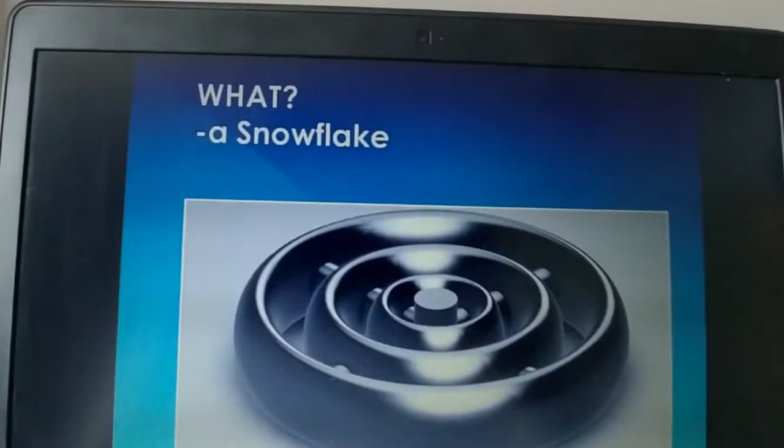Each settlement is called a snowflake. The 5 snowflakes can stick to each other in case physical components must be interchanged amongst them, a case which is represented in the following picture. All these drawings have been made using a 3D modeling software.

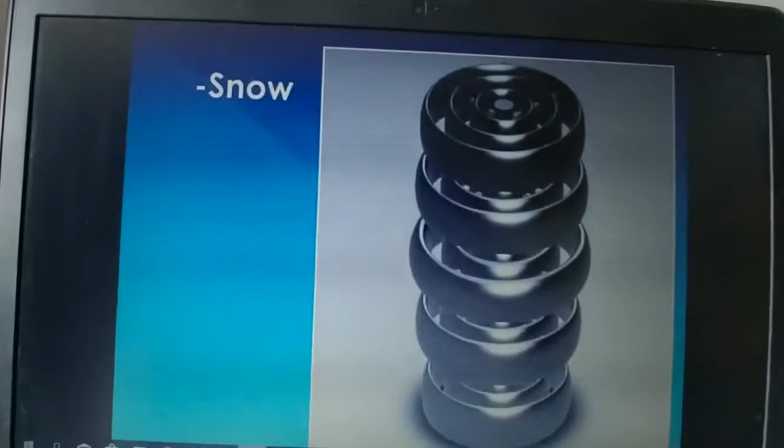Now, each snowflake consists of 3 concentric and interconnected tori. The only difference among these snowflakes is that their dimensions vary. The most important one, which is also the largest, is sent to orbit around Mars. The maximum capacity of each snowflake is 10,000 people, therefore there can be as many as 50,000 people in total on Snow.

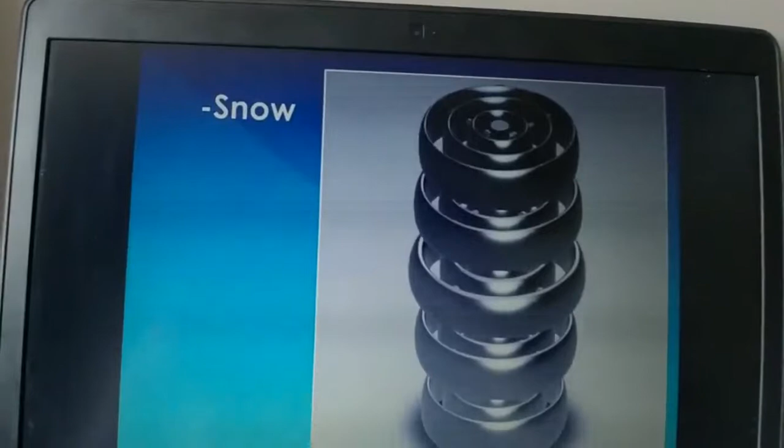The largest torus, Torus 1, is the one containing humans. Torus 2 is the one where agriculture is being practiced and where the data is safely backed up. Torus 3 is where all the fabrication of materials and the industries take place.

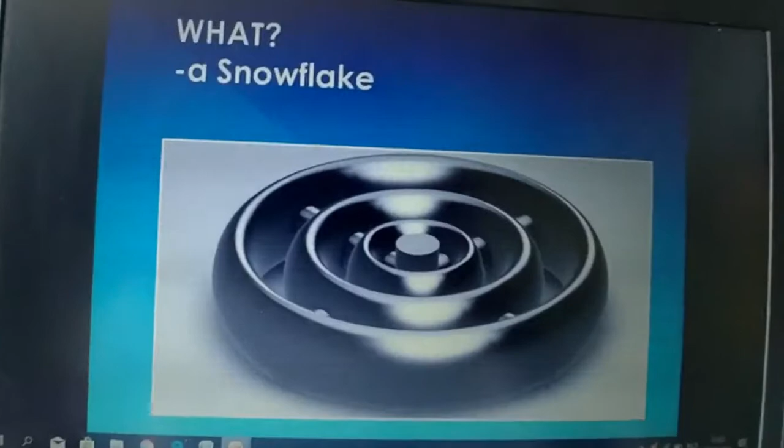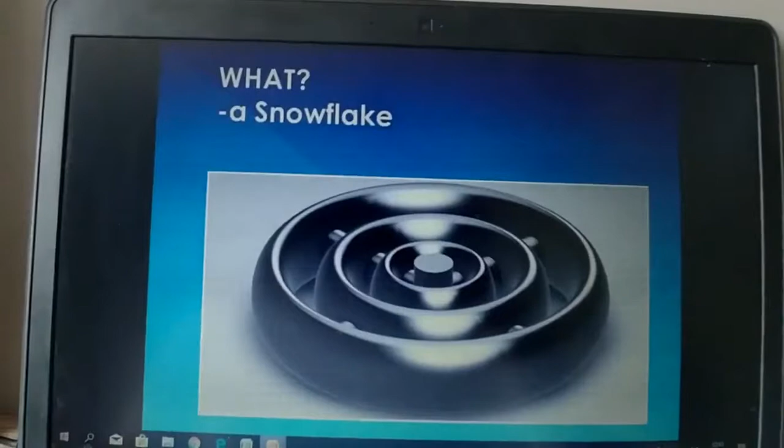But by now you must be wondering, why did I name it Snow? Well, Snow is the title used by the Nobel Prize winner and best-selling author Orhan Pamuk for one of his books, where he tells the story of a struggling poet. Snow is what connects people's souls in his book. It is what the poet refers to in his sea of thoughts. Snow is what everybody has in common.

Also, snow is a pure and beautiful natural phenomenon that does not only exist on Earth. It forms on some of the planets around which the space settlements orbit, even if it comes in the form of diamond or methane shower.

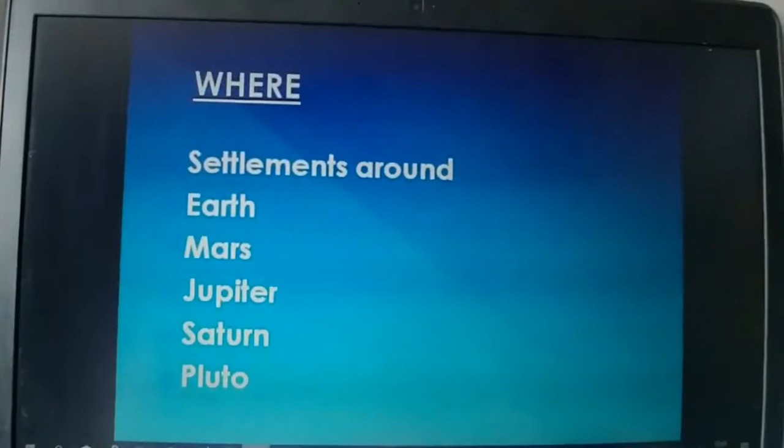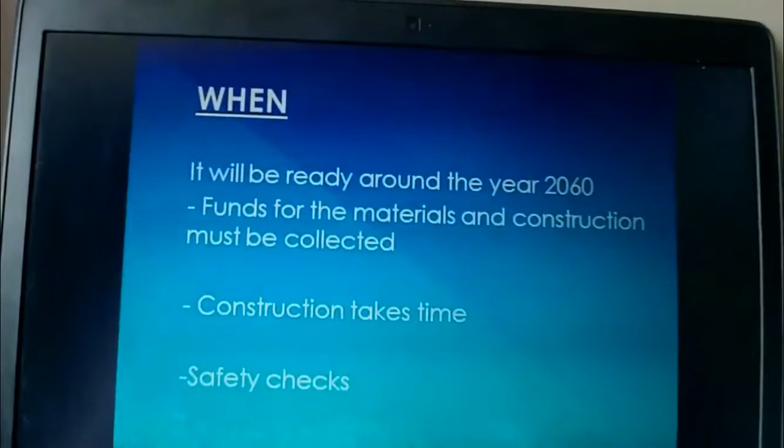Funds for the materials and constructions must be collected, which takes time. The actual building of such a huge construction lasts. Also, every single item on Snow must be checked, since it needs to provide everybody with safety, and it is very tricky to obtain this goal, since nothing similar has been done before.

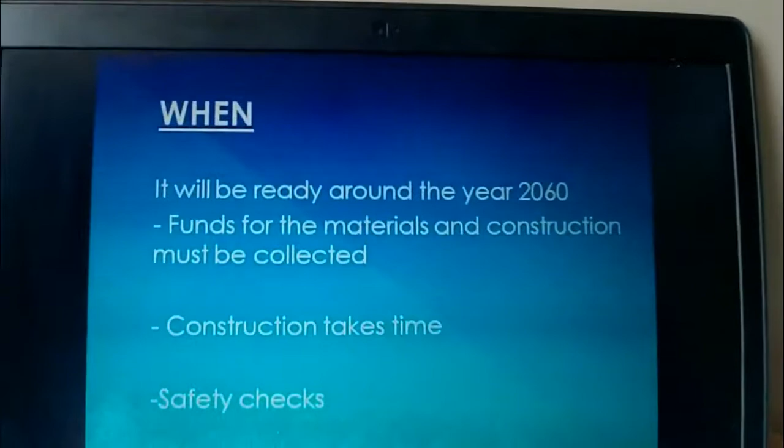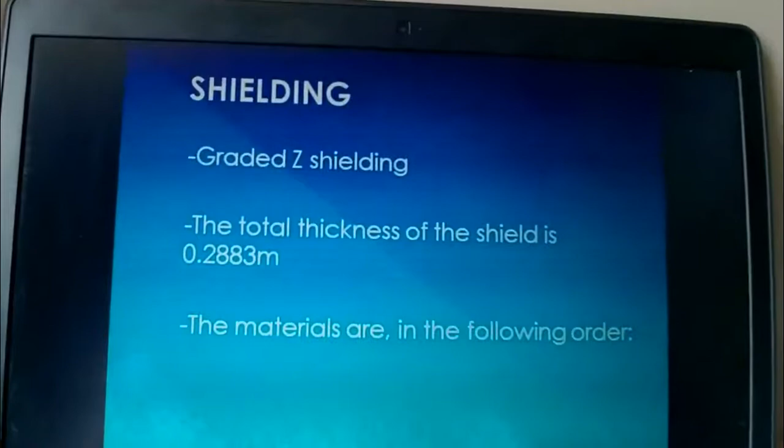The next major aspect Snow takes into consideration is its shield. It is known that there are 2 main forms of cosmic radiation: galactic cosmic radiation and solar particle events. They can cause serious damage to the human body, such as internal inflammation, cancer, and other long-term diseases. Therefore, the shielding must be chosen appropriately.

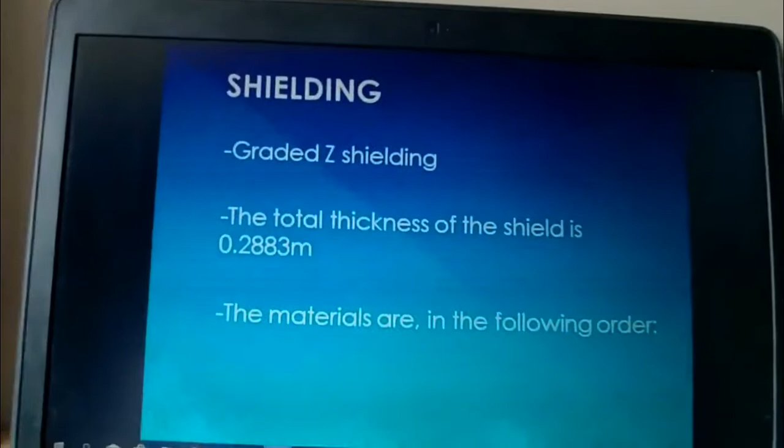Graded Z shielding is the best answer, since the various layers cancel the negative effects of the ones before them. The materials which are used are as follows: tantalum, lead, titanium, polyethylene, steel, aluminium alloy, water, aluminium, polyethylene again, carbon fiber, BNNT, aluminium, and titanium.

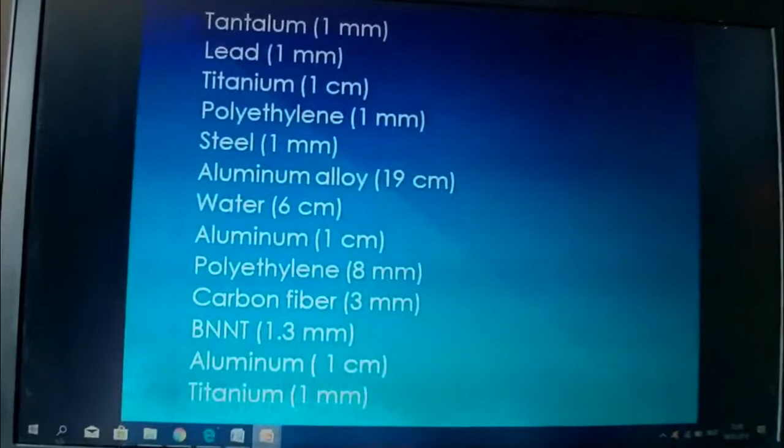The total thickness of the shield is 0.2883 meters. The water has to be around the center of the shield, supported from both parts by aluminium. Tantalum, lead, and steel are close to the exterior because of their high atomic numbers. Polyethylene in the exterior is for the galactic cosmic radiation to be blocked as soon as possible. The interior layers are placed in that order to offer stability to the shield.

Carbon fiber is not as thick since it is formed out of chemical elements that are very scarce in the places the snowflakes are sent to, so this element is harder to replace.

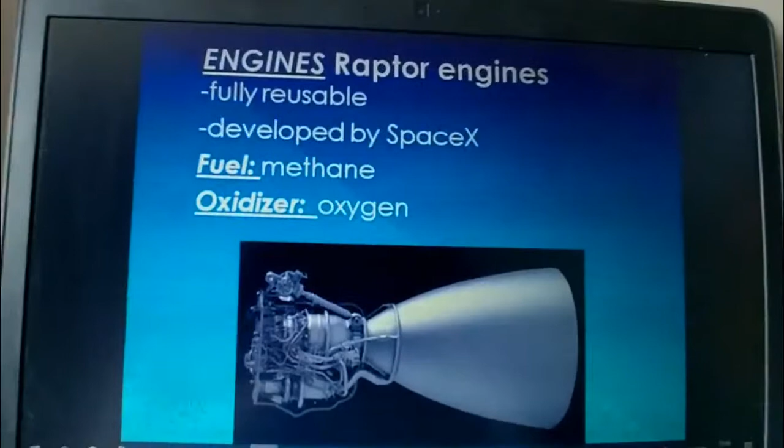The engines used by the snowflakes are Raptor engines, which are cryogenic, whose fuel is methane. They are currently being developed by SpaceX and are the most powerful rocket engines in the world. A very important aspect of Snow is that it does not need to invent some out-of-this-world technology, since most of it is already available, at least in theoretical form.

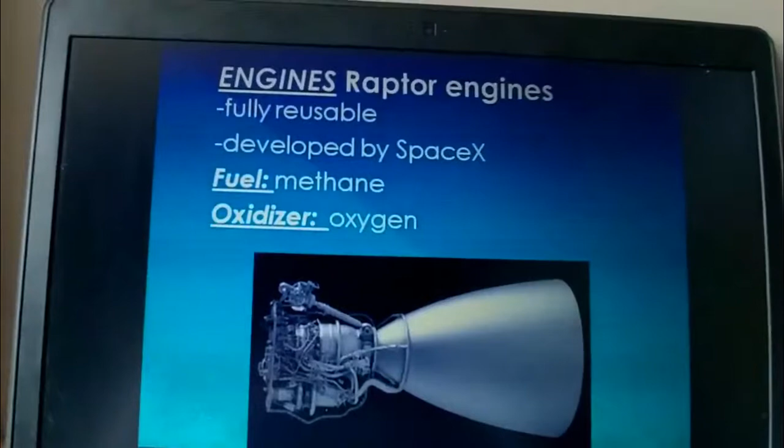Engines are situated on the bottom of each torus. A very important aspect of these engines is that they are fully reusable. Also, they use cheaper fuel, which is methane. The oxidizer it uses is oxygen, also easily attainable.

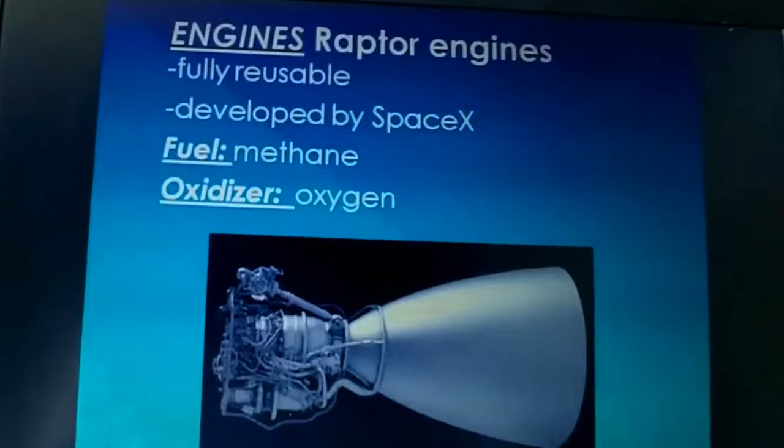Methane is a very great form of fuel because it can be found on the planets Snow orbits, and it also results from some chemical reactions which happen on board, such as the Sabatier process. The methane and other vital elements needed for Snow, which can be taken from the surface of the planets, will be transported onto Snow by using a Falcon Heavy rocket. Therefore, each snowflake has a Falcon Heavy rocket on board.

Journey: Snow is built on the surface of the Moon to minimize fuel consumption. From there, each settlement is sent to a specific planet. In order to reach even the furthest planets, Snow does not only use its own engines and fuel, it also uses gravity assist with other planets encountered on its journey.

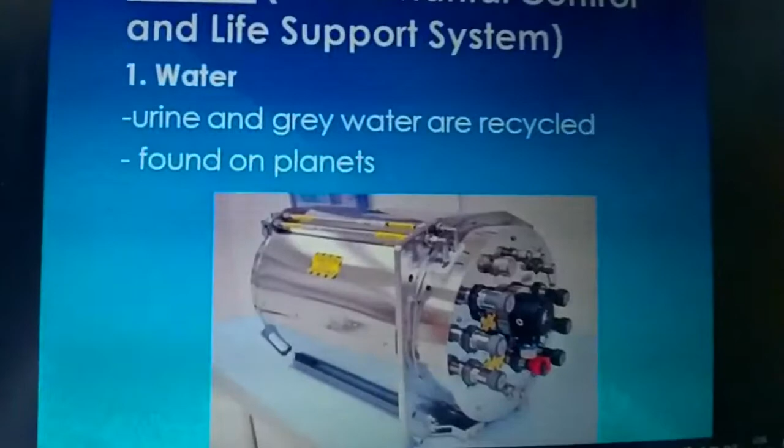ECLSS, Environmental Control and Life Support Systems. First of all, water. Water is what keeps people alive. It is what cools every system down. Therefore, the water will be recycled, and some of it will be found on planets and taken from there.

The atmosphere is composed of several elements such as oxygen, carbon dioxide, nitrogen, and water vapors. Oxygen is obtained from electrolysis and photosynthesis. The extra carbon dioxide is scrubbed from the atmosphere and used in the Sabatier process, resulting in methane and water.

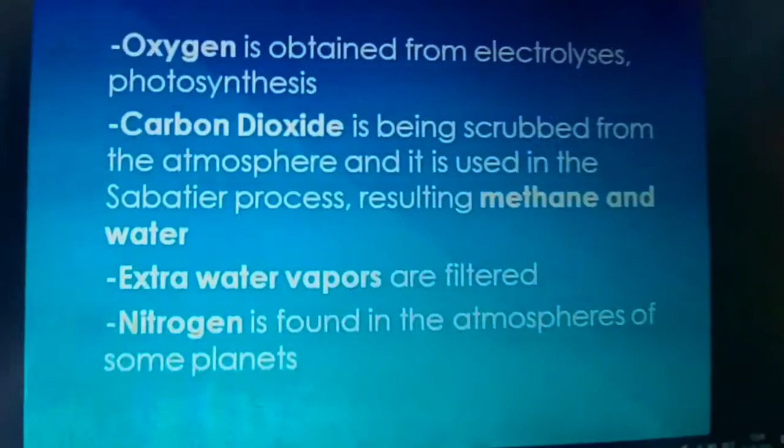The population of snow has a very large variety. People from 10 up to 75 years old are welcome to come on snow. The qualities they need to have in order to be part of the colony are as follows: creative, passionate, hardworking, empathic, honest, healthy, easily adaptable, and open-minded.

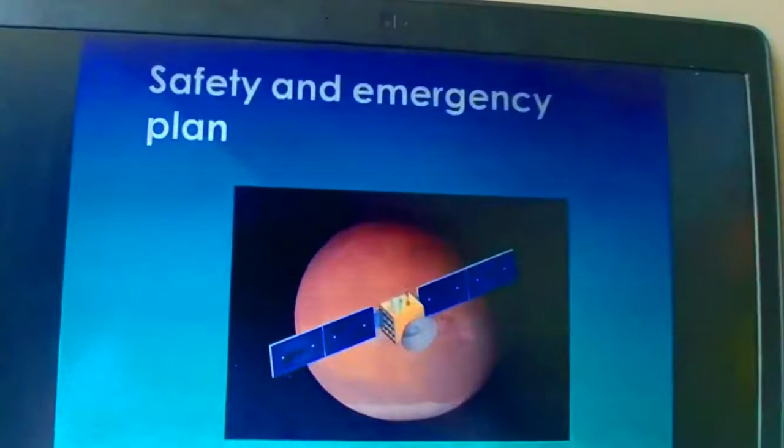Safety and emergency plan. Safety is very important, especially on such a huge space settlement as snow. The technology is very advanced. The systems receive information from the outside and only perform certain commands if the programmed conditions are met with the ones available in reality. Also, there are 3 communication sites on the Moon, Titan, and Mars, which control the settlements

and prevent it from destruction. Torus 2 is the safety escape. In case disaster strikes, people evacuate Torus 1 and 3 and make a journey inside Torus 2 to a safe destination, perhaps another settlement. In this picture, you can see a satellite orbiting around Mars.

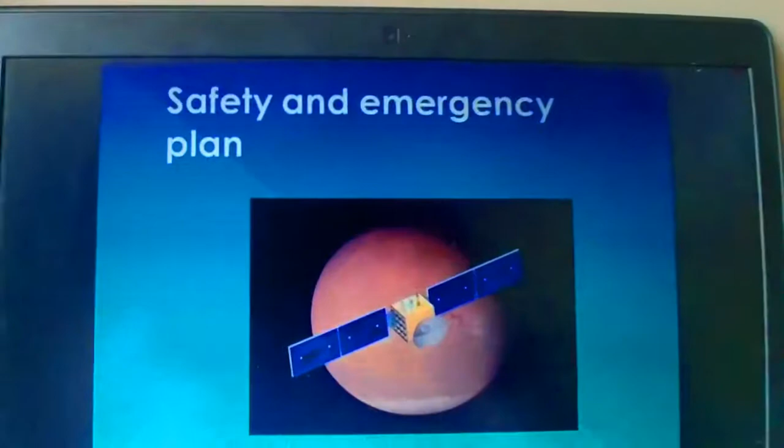There will be many satellites orbiting around planets and maybe also around snow settlements in order to provide greater communication and to prevent data from being lost.

Research is one of the main reasons that snow has been born. Serious research will be done in the following fields: physics, pharmacology, medicine, and nanotechnology. In physics, studies will be done regarding planets, dark matter, and the cosmic microwave background radiation.

Snow is special because it provides some features. First of all, it is a multi-planetary settlement. The research done is therefore much more serious and advanced, and the results will be seen much faster.

The snowflake orbiting Earth provides a hotel for those who are interested. It can host a maximum of 1,000 people who pay for their stay. This is one of the forms of regaining the money which has been invested into the construction of snow. Some people do not want to spend a lifetime in space, and therefore the hotel is the perfect answer for them.

Blue skies. People's moods are mostly influenced by the weather. The blue skies and sun make them happy and joyful. This is why lights and holograms are hung all over Torus 1 in the living areas, in order to simulate the night-day cycle. Also, in order for people to have a functioning internal clock, the time on snow functions as it does on Earth, 24 hours a day, 7 days a week, approximately 52 weeks in a year.